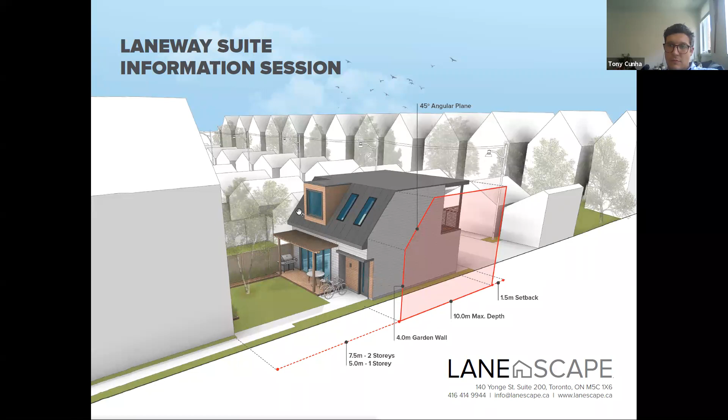So shall we dive in? Yeah, absolutely, let's do it. Cool, go ahead. Sure.

So we'll run through probably a similar outline to what you saw last year, although with lots of updates. We'll start with the macro about why Laneway suites are a thing, which we'll go light on since we've already talked about that. Then Tony will take you through the bylaws themselves so you can start to see how the Laneway suite policy is actually looking on properties. And then we'll extend that further by going through some of our projects under construction and talking about the typical case studies we see, so when you're speaking to your clients and buyers, you can understand when a Laneway suite is appropriate and what type is ideal.

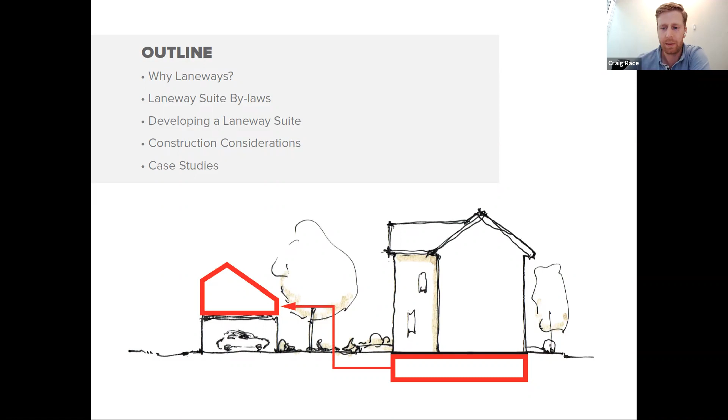So to talk about the macro, Laneway suites have actually existed in Toronto for over a century. There are a lot of historic structures that got absorbed into our urban fabric that were industrial and agrarian structures, like you'll see on the next slide here. These tended to predate the automobile—they were barns or industries that were just part of urban life before we had segregated zoning policies, and we actually needed things like horses and cows within our neighborhoods to sustain our communities. Once we started seeing those uses leave our neighborhoods, people still had these buildings kicking around, and they've been converting them into houses ever since.

That led to the typology originating as something that was more of a renovation of an existing typology. But in the late end of the 1900s, prior to the as-of-right policy being passed in 2018, I'm sure you've all seen the sexy architecture photography of new build homes constructed on parcels of land on laneways. These tended to be really exceptional works of architecture, but they required someone with a really unique property and a lot of money and knowledge to get through the OMB and other opaque planning processes. And that difficulty meant you would usually only do it if you were going to try to get a 3-story house—something fairly large and generally out of context with laneways.

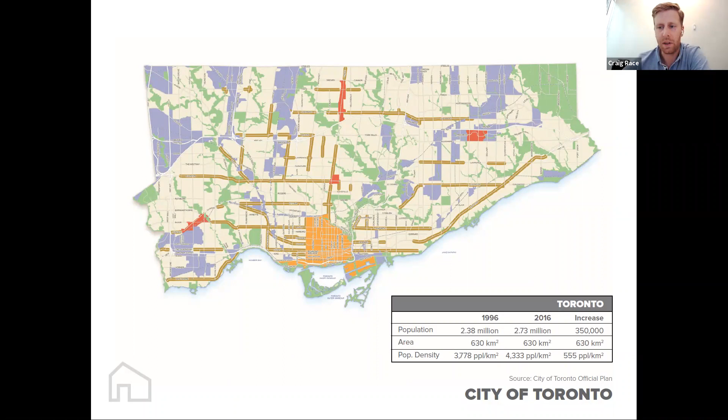So if we look at the census tracts in Toronto, for where our population is growing, you'll see that all the highlighted tracts are where we have population increases. Those tend to be centered around areas where we have mid-rise and high-rise zoning policies. Kind of makes sense. We have about 20,000 people a year moving to the city of Toronto, at least we did before COVID, so it makes sense that they would all move into high-rise towers and mid-rise homes where we're adding the majority of new density to the city. So that kind of tracks.

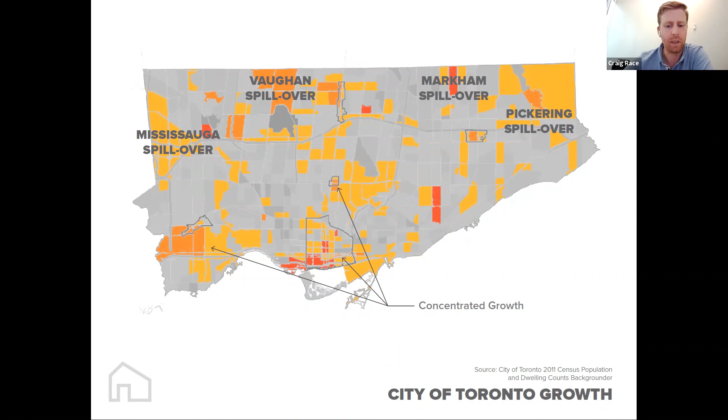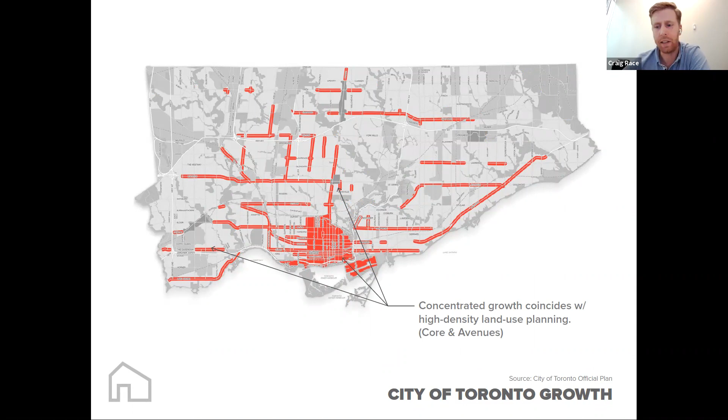Go to the next slide here, Tony. That's got the areas where we have those policies in place. But then when you look at the rest of the city, over half of our land area actually has a shrinking population. On the next slide, you'll see these are all the census tracts where our population is declining. And when you look at the fact that we have such a large gross population increase, the fact that the majority of our land area is actually accommodating fewer people does not make any sense.

That's led to a planning concept that planners are calling the yellow belt, not to be confused with the green belt. The yellow belt is really something that missing middle housing, and what we call missing little housing—things like laneway suites and garden suites—is really trying to readjust for. So the idea is that we want to maintain things like green space, but start to infuse detached housing units into these areas so that they can at least have a stable population while we continue to accommodate the majority of our growth on the avenues and in the core.

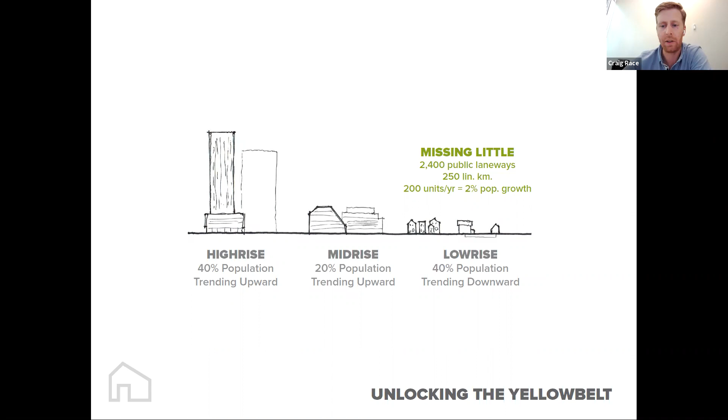So when we speak of the missing little, laneway suites alone are accommodating about 2% of our population growth every year. Garden suites will begin to increase that, which we'll talk about more later. But we're starting to see them have an impact on where people are choosing to live and how they're affecting our growth. So when you think of a laneway suite, always best to think of them as sort of like

a basement apartment that's in the back of your lot on top of your garage. They are not severable, which is one of the keys to remember. They will never be sold separately from the main house. The main reason for that is that services for them come from the main house.

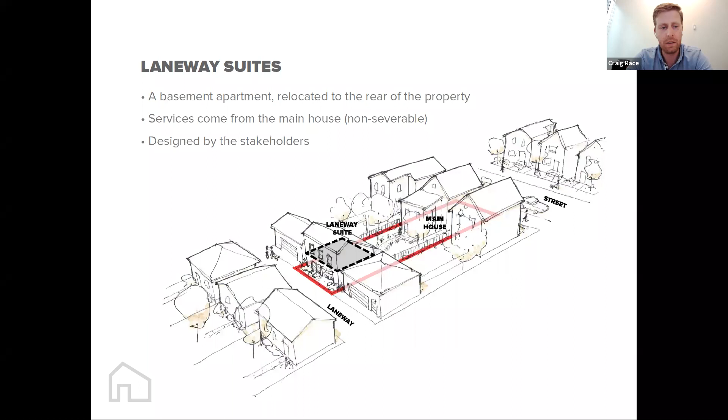And finally, the reason we think they've had such success, and why we have access to them as-of-right, is because they were so sensitively designed by stakeholders. This is a policy that homeowners literally came out to public meetings and designed with us and with the city. That's why we've seen such great buy-in and why they've become prevalent in our neighborhoods.

So it's important to remember the features they bring to a neighborhood and to a site. They're a very gentle form of intensification, relatively speaking. They're making good use of laneways, which we've always had a lot of life on—families have always used them for playing and socializing. Well, this helps animate them further and put eyes on them to make them safer.

They're really helping us diversify our housing stock in the yellow belt, which is leading to affordability. Now that's not technically capital-A affordability, but what laneway suites do help with is people who want to either accommodate a loved one on their site without having to buy them a condo, or rent out a unit but still have the main house to themselves so they can have a high quality of living. And not to mention the value it adds to a property, which we think has a big impact on a homeowner selecting whether they'll build one or where they're going to buy.

So now let's take a look at the bylaws themselves so you can see in more detail what that looks like. I'm going to run through a high level overview of the current bylaws. These were first put in place in August of 2018, and there have been a few small evolutions over the last 3 years.

At a high level, the term as of right means there's no requirement for a committee of adjustment or special planning approvals in order to develop a laneway suite. You would move straight through to building permits, so long as you comply with the bylaws.

Laneway suites are exempt from development charges. Typically if you're adding a unit or building a new home in the city, there's a levy applied based on the bedrooms or square footage you're constructing. For a single bedroom unit, that's $26,000; a 2-bedroom unit is closer to 50. That's a huge incentive for the average homeowner to take on a project of this nature.

There are some affordable housing incentives available through the city, and tax rebates available through the CRA. Vehicular parking is not required on the lot, so you could have a multiplex in the main house, which traditionally would need a certain amount of parking to be legalized. But as soon as you introduce a laneway suite, that parking requirement goes away. The laneway suite also does not count towards your lot density.

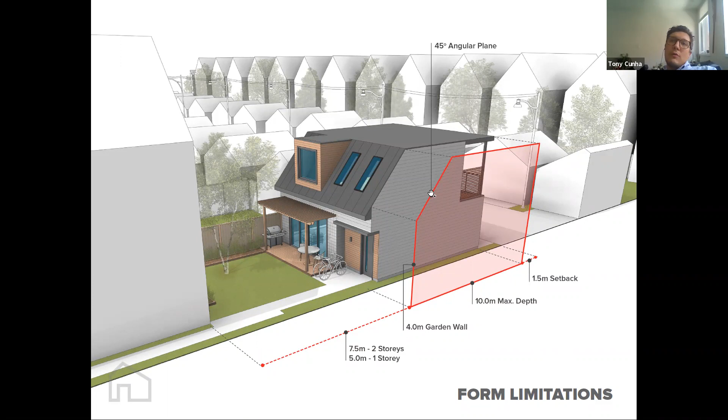The last main dictating piece you'll find on quite a few laneway suites is this angular plane. It's best described as an imaginary line fixed at 7.5 meters from the main house—imagine a 4 meter high line going upward and then chamfering back at a 45-degree angle. Your building must not project through this imaginary line.

In certain cases on a tight lot, we'll recommend doing a single story unit. You can do basements—a great way to maximize square footage with a single story unit on a small lot is by digging downward. There's some substantial cost to that, but when you look at the return on investment at that size footprint, it often makes sense.

For standard lots, when we're minimizing the separation between the 2 buildings, we'll just rigidly adhere to that zoning envelope and that imaginary line. On a deeper lot, it's always possible to locate your laneway suite further than 7.5 meters, which would allow you to clear that imaginary line entirely and build straight up—which is why you'll find some of our projects have that angular roof and some don't. We just find that sweet spot where it makes sense to maximize volume, outdoor and indoor area, and function all together.

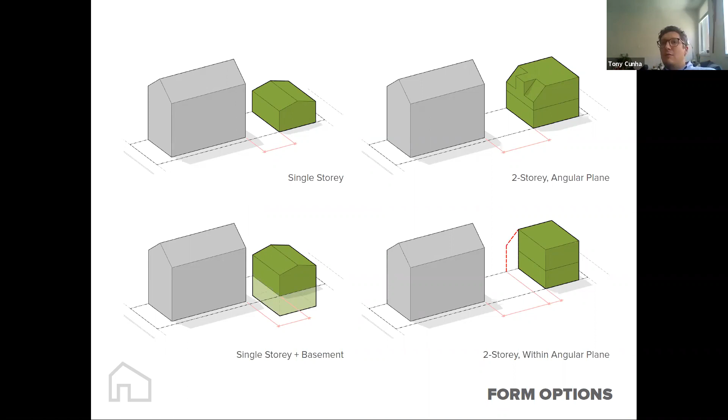So you can project through the angular plane with a dormer. This is a dormer projecting through that roof line, maximum of 30% of the building width, measured at 4 meters above grade.

And in exchange for this free density, whatever's left over, the city has strict requirements on landscaping area. So the area between the main house and the laneway suite, if the lot is less than 6 meters frontage, you need to provide 60% soft landscaping.

Soft landscaping is sod, mulch, soil, basically any organic ground cover that allows rainwater to permeate. So things like decks, concrete, gravel wouldn't comply with soft landscaping requirements. In most cases, existing hardscape must be retooled, but it's a small thing to endure in order to leverage the rest of the lot.

That requirement for the rear yard goes up to 85% for lots greater than 6 meters in frontage. And in all cases, the setback between the laneway house and the laneway itself must be a minimum of 75% soft landscaping, excluding a permitted driveway. So if you wanted to keep a garage within the building, you don't have to, but some people do in order to maintain parking for resale or whatever else it may be—that would be exempt from that calculation.

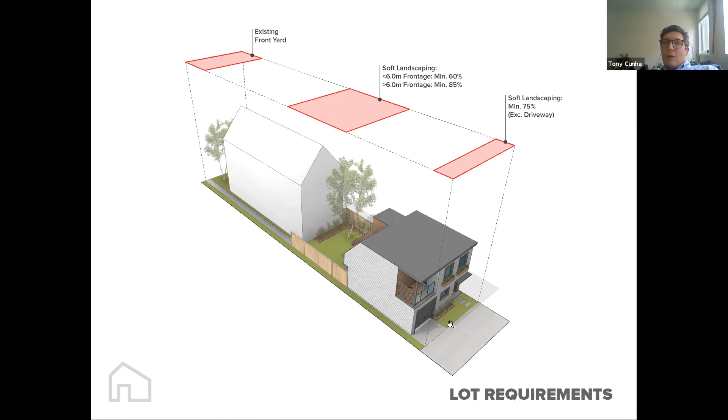Then a few other smaller requirements. First, the building height is maximum 6 meters or 2 stories. So usually we can get an 8.5 to 9 foot ceiling on the ground floor and then an 8 foot ceiling on the second floor, or vice versa.

And you can exceed that building height with mechanical equipment and whatnot, so long as it's no higher than 1 meter above that building height restriction, and it's set in from the roof perimeter a minimum of 1 meter.

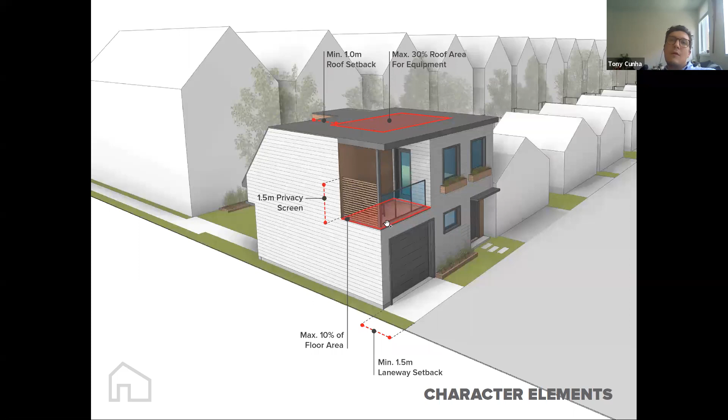And you can have a balcony or terrace, whatever you'd like to call it, so long as it doesn't exceed 4 meters above grade, and it has to be within the building footprint facing the laneway. It must not be on the rear yard side.

So whenever you're looking at a lot to qualify for a laneway suite, this is probably the most contentious issue—emergency access probably disqualifies about 25% of the properties that come across our desk. So basically, when you don't have a house facing the street, you need to be able to get fire and emergency access to that building somehow.

So you have two options in that case—this is an either-or, you don't have to provide both. The first is pretty straightforward: it's a maximum of 45 meters measured from the entrance of the laneway suite at the backyard, down the side yard to the front. This side yard access route must be a minimum of 0.9 meters, about 3 feet.

Ideally that's wholly within your property, measured from your existing building face to the lot line. Now, if it's not, and you have to use a portion of the neighbor's property to get sufficient clearance, then there is an agreement available that you can enter into with your neighbor in order to ensure that area is reserved for emergency access between neighbors.

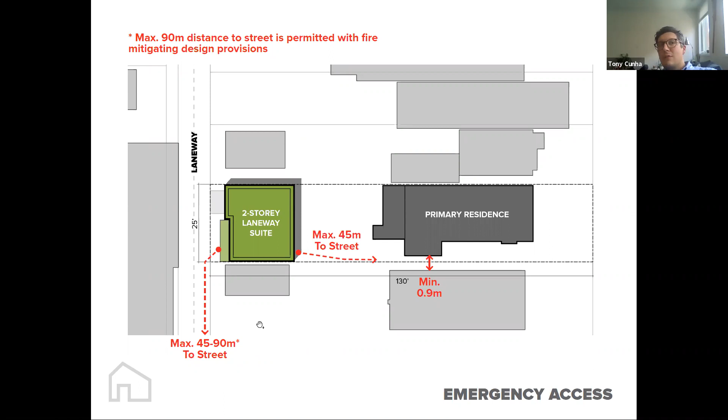Then the second option is a 45-meter access route via the laneway to a street. Now that 45 meters can be exceeded up to 90 meters, so long as you provide sprinklers or a fire alarm. There's a couple options there. So the best case scenario is that you're within 45 meters, but if you can get in within 90 meters, that's totally possible—you just have to do a little bit more work and incur a little bit more cost in order to make that happen.

So applying this, we had, in this case, 44.8 meters measured to the curb, and then 31.2 meters measured from the curb to the hydrant. The best way to look at this is you have a pumper truck or fire truck that pulls up to a curb—they don't access the laneway, and they have to extend a hose in one direction to the fire and a hose in the other direction to the hydrant.

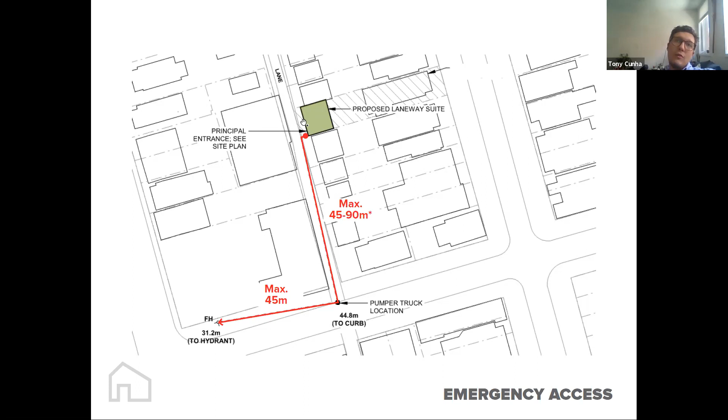I like using this example because if your entranceway was on the north side of the building, we would all of a sudden be over the 45 meters and we would have to put sprinklers or something else in. So it's important to be conscious of these things and be able to design in a way that makes the most sense.

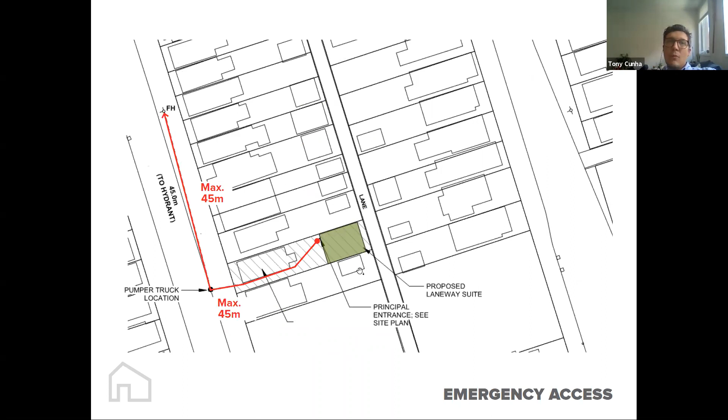We have quite a few clients that are building for extended family, whether that be in-laws or aging children, or a combination of both.

And then the last is increased space. It was a very popular cohort for us, particularly in peak pandemic, where people were looking for that away-from-home office space that could flex into a hobby space, storage, or just additional space for their kids on the weekends and things like that.

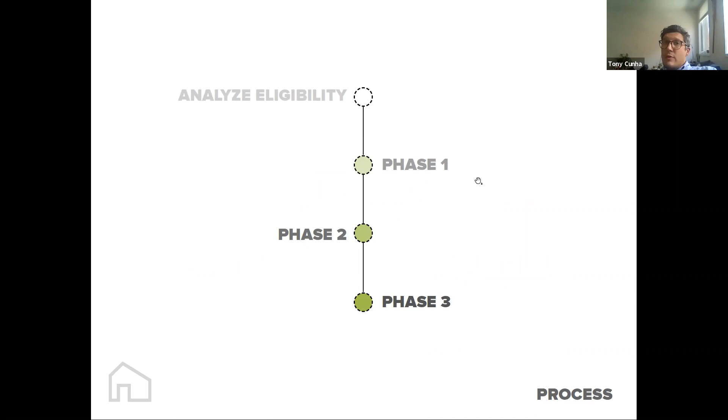So we always advocate for a three-phase process. This is how we structure our services. Before you get there, we always recommend analyzing your eligibility, identifying opportunities and challenges, and doing as much due diligence as possible.

There are quite a few service providers in the market, and a lot of them are very qualified. But the unfortunate thing is that we've found many agents work with certain providers that don't have a complete grasp on the bylaws and may have some misleading material in their packages. So we highly recommend checking in with at least two different experienced professionals. Let me put it that way.

So for example, with us, we provide free property reports. All we need is an address or a listing, and we turn these around within a couple of hours. The report has a checklist analyzing eligibility, determining buildable square footage, alongside some example floor plans and projects of a similar nature, and then a complete summary of the process.

Tony, can I just jump in real quick here, because you guys did one of these for Samantha on our team just a few weeks ago. It was her first week, and she was showing a house her client hoped to build a laneway house in. Unfortunately, he didn't buy the property, but that report you provided her within, like you said, a couple of hours, was beautifully presented. It had all of the options—it was really, really helpful. So I thank you for that, it was really a great piece.

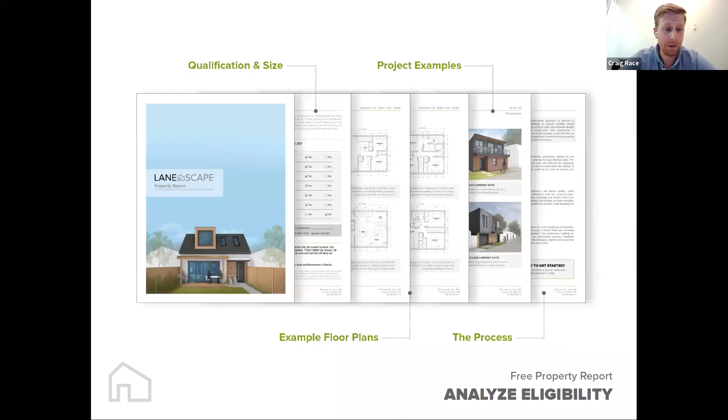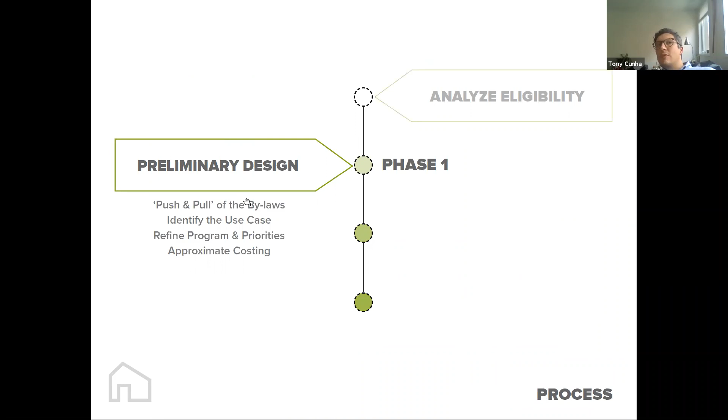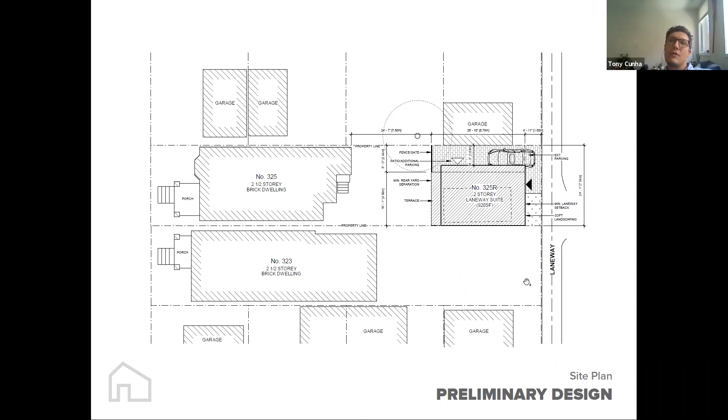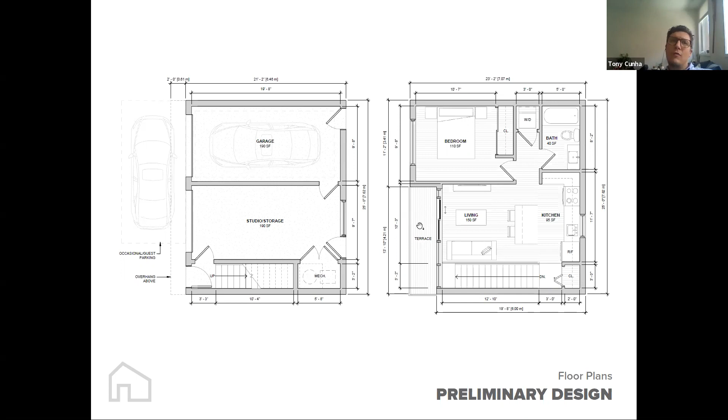Thank you. And then we really jump into preliminary design. This is our first step of the design process, working through a basic site plan, identifying key items like protected trees, minimum setbacks, access, privacy, parking, and basically applying the bylaws to the property itself. We put together basic floor plans that are dimensioned, highly resolved, but not quite engineered—I akin these to a condo sales plan, making sure we have the exterior envelope, but also working from the inside out to accommodate our programmatic goals.

We do a cost analysis. We're not only architects, but developers and builders, so we like to connect the dots physically and financially—looking at different options for bedroom counts versus parking, different considerations with costing, but also the revenue potential, both in terms of monthly or annual cash flow, and in terms of stabilized value using a standard cap rate.

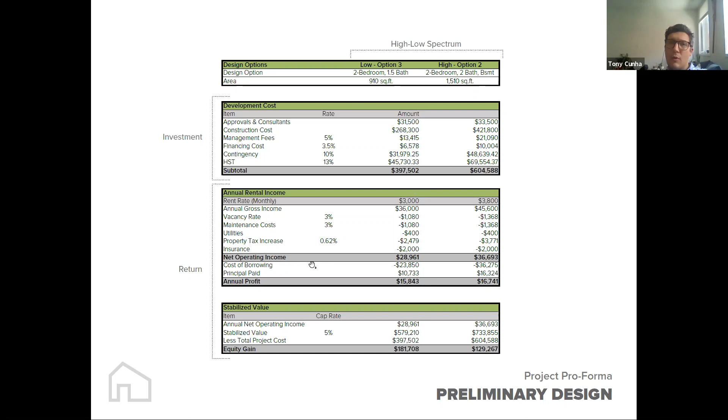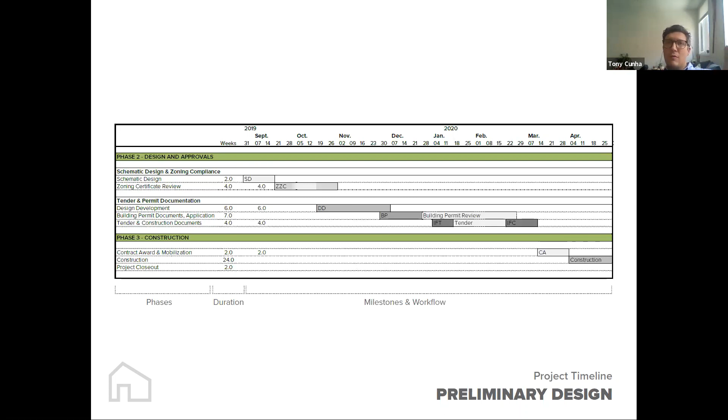Time is money as well, so looking at the timeline and being realistic about the phases of deliverables and how we evolve this from day one to keys in hand.

Sorry, Tony, I just want to point out we do provide everything Tony just listed in phase 1 as a design package that is not free, but it can be really good if you're selling a property. The property reports are free and unlimited. Phase 1 would be something to consider if you have a listing with really good laneway potential, to spend the money on customized floor plans and having budgets and schedules to leave out at your open houses or to send to buyers. That's far more dense and something we think is worth its weight in gold when it comes to listing a property.

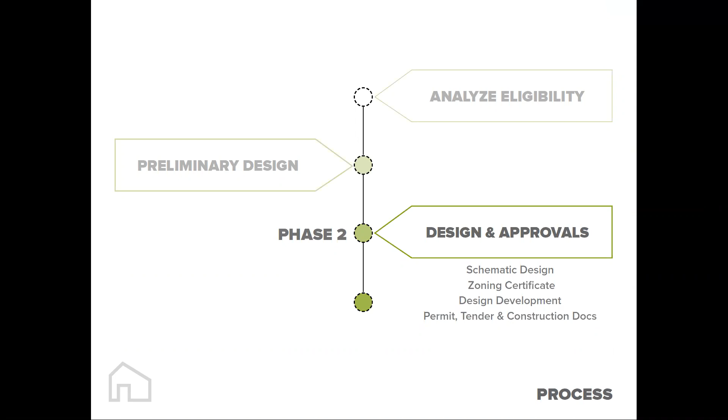Is there a standard price for that, or does it vary with the property? That's a standard price, we bill it's $1,850 plus HST. We turn that around within a week or a week and a half if we have a survey available.

Thank you, and it usually includes a couple of different options. A different user is going to want to see different things in a laneway suite, so normally we do an option that's geared for revenue and an option that's geared for grandma, so you can see what the difference looks like from a design perspective.

Once we've decided on a general direction, we're on the same page with costing, and have more or less locked in those floor plans and building footprint, that's when we really dive into resolving the design.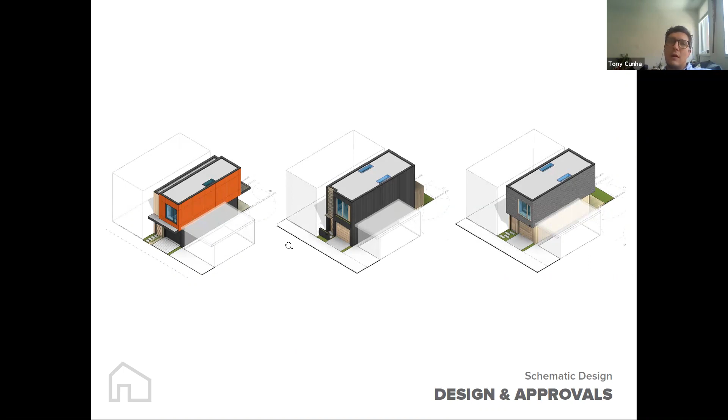We start by putting together multiple options for the building envelope, how this can be cladded, how the geometry can work, how apertures and overhangs can be treated in different ways. Then we'll put together some eye-level perspectives. We work in 3D, with a 3D modeling software that's incredibly powerful, allowing us to literally walk the average homeowner through every aspect of the design process. And then we resolve everything.

We structure our services in a way where we include all of the structural and mechanical engineering. We are your one-stop shop.

I always tell the homeowners we work with, you have three responsibilities. The first is review and provide feedback on the design. Number two is provide a signature on the application. Number three is pay your invoice. Besides that, everything is in our hands, and it's a very seamless process that does not take very long. You said those in reverse order, by the way.

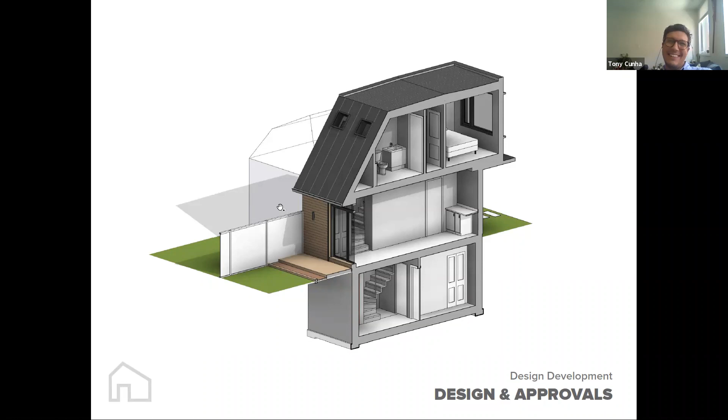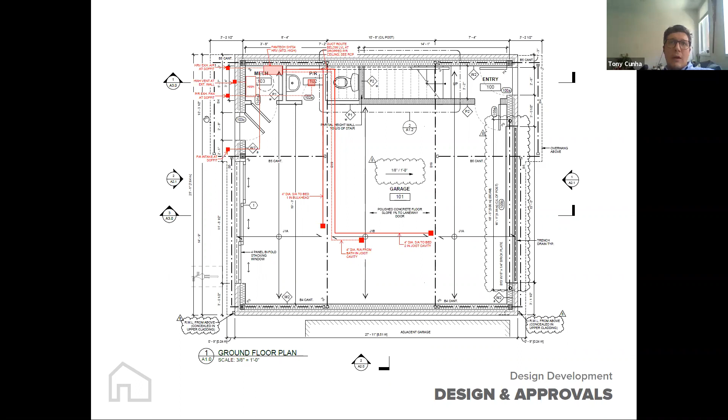We take pride in what we do with our drawings as well. Another thing I commonly say is the reason we're able to have so many projects underway at a time is because we put the time and effort into resolving the building in digital space before physical space. So everything is coordinated, and we work through this not only aesthetically, but also functionally, working through interior palettes and things of that nature.

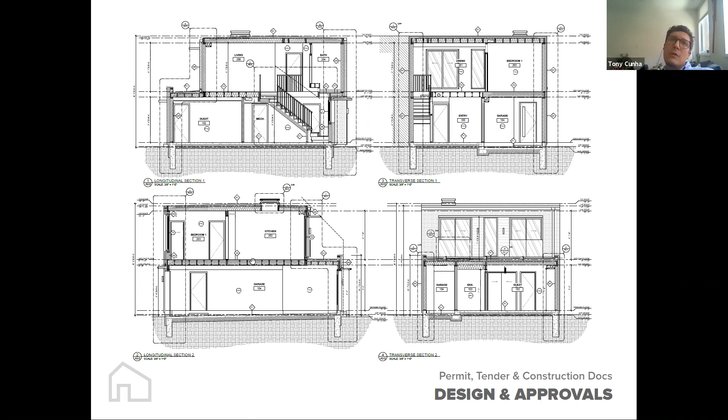And then ultimately resolving our drawings for permit, tender, and construction, working through details and interior elevations and details as well.

It's a little bit unique to have such a comprehensive package from one provider, especially in a custom residential space, but we find that working with the average homeowner is a huge value add. I would say 95% of our clients have not done so much as renovate a bathroom, never mind build a brand new house. So it's a very pleasurable process when you're able to really focus on the things that matter, and you have one point of contact that evolves everything from day 1 to day 300.

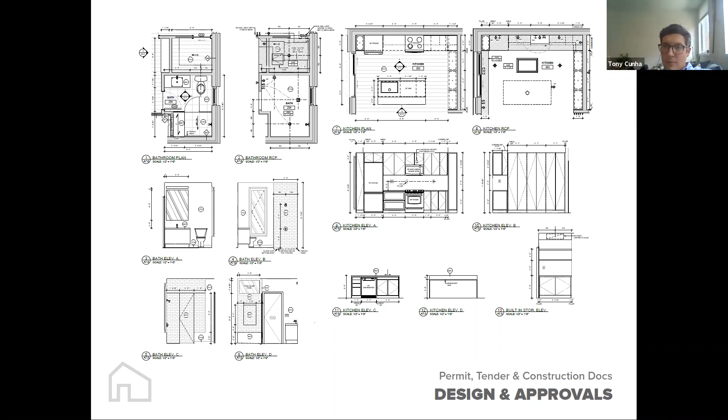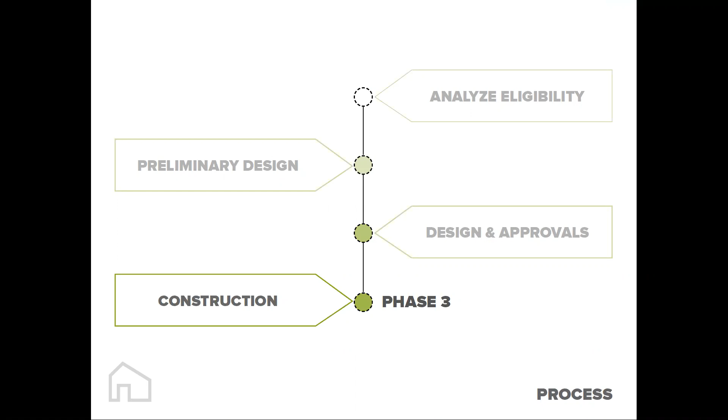I don't think we can underestimate that, because when you have that one point of contact and somebody coordinates everything for you, you don't have to jump around between people trying to figure it out yourself. So I think that's really, really important too.

100%. Everybody's busy, that's what it is. You don't want something looming over your head, so what we rely on is a very templated process.

The way I best explain it is, a lot of people ask, do you do prefab laneway homes? We don't do prefab in terms of construction, but our process is prefab. Everything behind the curtain, there's an app for that, a form for that, a template for that. Everything we do is completely custom, but everything is a kit of parts, which allows that process to move so seamlessly, but also for the homeowner to be engaged and in control.

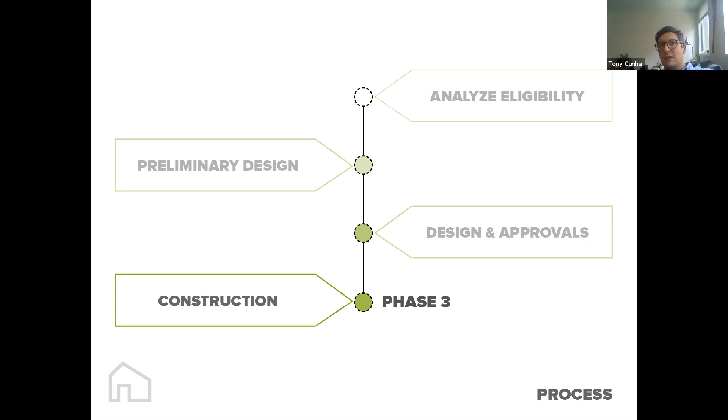So we'll dive into construction. As Craig had mentioned in the beginning, service connections are all made to the main house. Your 4 key pieces here are your hydro, your gas, your domestic water supply, and your sanitary line, sanitary being your wastewater.

You can put a separate hydro meter on the main house and have the laneway suite on its own account. But with gas and water, it is all on a single meter from the provider. You can put a check meter on, of course, if you'd like.

We will often have to upgrade the electrical service from 100 amps to 200 amps. Gas is usually sufficient, and in some cases we have to increase the water supply from the street from a 1/2-inch line to at least a 3/4, but that really just depends on the demand in the main house and the age of the line.

So really when we're making these connections, it's a matter of looking at it—there's 10 different ways to approach the same thing, but there's always one very clear best way. So things like access, location of the existing services, the condition of the basement, and the nature of the lines being connected—for example, do you need gas or not—those different factors all come into play in determining how best to make these connections.

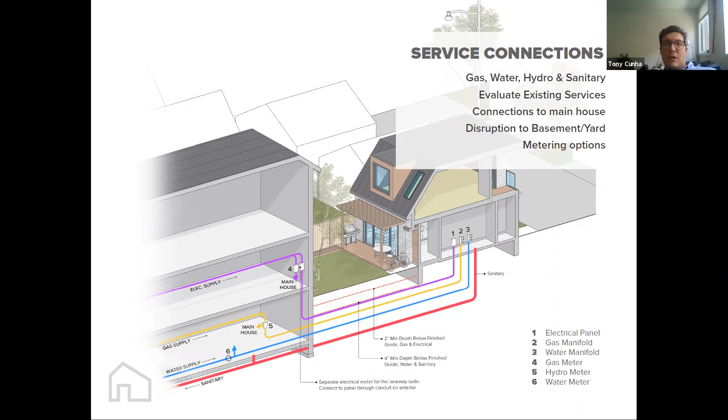Our structure—we use standard stick frame construction. We have looked into various different methods of prefab or modular construction, and have always found that a sort of 2x6 and TGIs are going to be the most cost effective, the most versatile, and quite frankly, the easiest to build in the tight confines of a laneway.

So we are constantly evolving our details and our methods, but what we're able to do with these standards is competitively tender to a wide array of different contractors. Some of the homeowners we work with have builders they like to work with as well, so this allows us to be flexible.

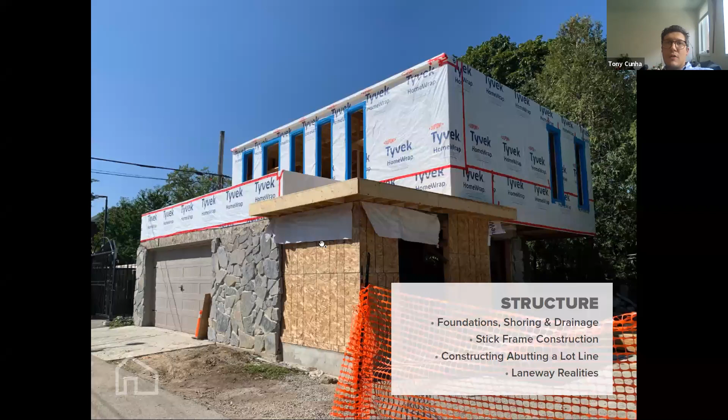Construction drawings are like sheet music. There's an inherent understanding of standards. So the less you diverge from the standard, the more cost effective and the more successful you're going to be.

And likewise with the building envelope, we do employ going above and beyond code minimums. We use things like exterior insulations, sheathing tapes, smart barriers, and we believe in strategic investments in the key aspects of the build.

So you're creating a super airtight, thermally efficient envelope. Just yesterday I was walking through one of our builds that has a concrete floor on a concrete slab on the ground floor, and I was in the garage and it was cold, and I said, 'Man, can you turn down the AC?' And he said, 'The AC is not on.' This thing is so airtight that a lot of times it's a mere formality in putting in HVAC systems.

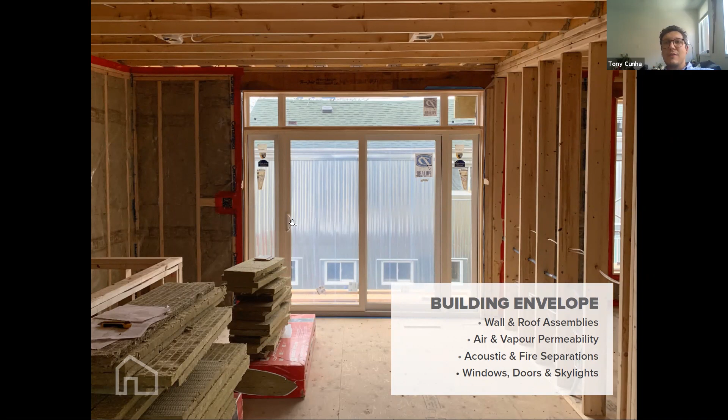In that same vein, HVAC systems—really, the laneway suite is heated and cooled on its own. So we're running those raw services to the laneway suite, but you still have an air handler, a furnace, or a heat pump that's heating and cooling air at that location.

So really what it comes down to when you're selecting the system is how big is the unit, what's the control and comfort level that's required, and what's your energy source. Really, this is another one of those things where there's multiple different ways to approach the same thing, but there's always one best way.

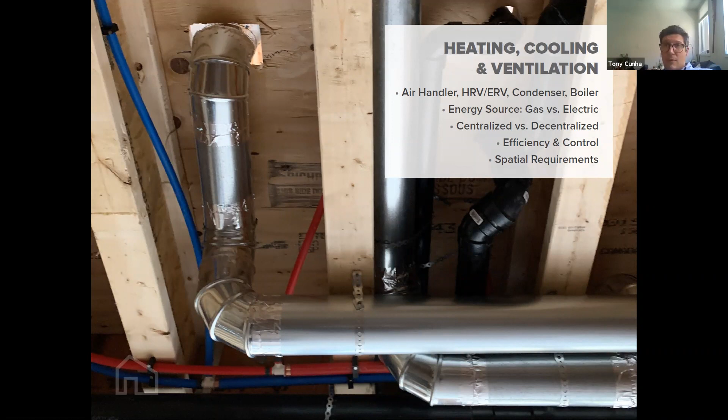And then finishing, really, at every point in the process, there's sort of 3 key things that come into your decision making: cost, maintenance, and durability. And then between the different use cases, whether it be rental or for grandma or for yourself, you always want to weigh those considerations differently.

And let's not throw out the idea of the aesthetic direction. I mean, quite a few of our builds are modern, but we do quite a bit of classic as well. And again, what about the strategic investments? Going a little bit further with a nice countertop, but dressing up some IKEA cabinetry, or looking at alternative ways of achieving hardwood floors or whatever else it may be.

So we'll dive into 2 quick case studies. The first is our Seaton Village laneway suite, not sure if you've seen this by now. This was finished about a year ago now. This is a 1,050 square foot unit built for mom and dad's daughter.

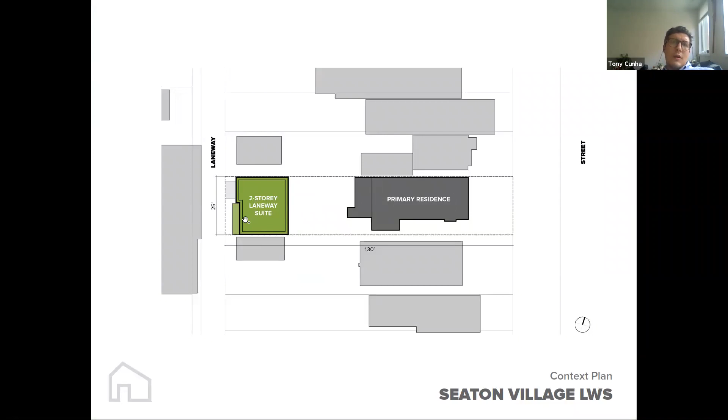The homeowners lived in the main house, had a very tight budget. Project almost didn't happen, but what we did was determine a realistic budget upfront and work toward that at every stage in the process. So the ground floor, we had a single car garage for mom and dad, a home office that could become flex space now and in future.

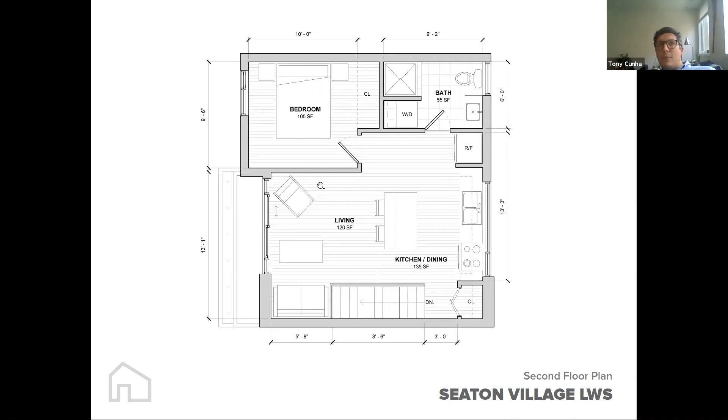Then the second floor was a compact 1-bedroom, very uniquely tailored to exactly what the homeowner's daughter wanted and required. So here, total construction budget, or the total development budget, arrived at about 380K.

Just being frank, that's not possible in today's market. Most of our developments are coming in around the 450 to 500K mark. But there's always room to work toward budget. And then we always put together a return analysis, regardless of the use case.

So we approximate this, it's a 1+1, right in the heart of Seaton Village. It's walking distance to a subway. So we projected a $2,800 a month rental rate, minus operating expenses, cost of borrowing, and factoring in principal paid. We're looking at about 14 grand cash flow annually.

And then when you apply a very conservative 5% cap, you're looking at a total stabilized value of 540K, minus your project cost at 390, gives you a net equity gain day one of about 150 grand.

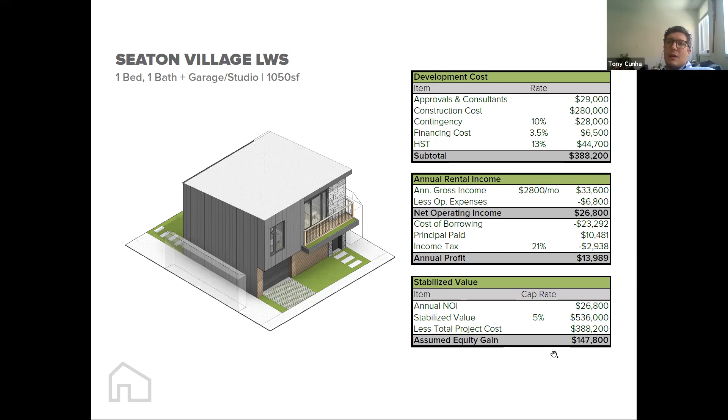And then this is on the opposite end of the city. This is at Danforth and Dawes. We worked with the homeowner here. He was on the hunt for a laneway eligible property. So we actually went through an analysis of probably 5 or 6 other lots before we landed on this one.

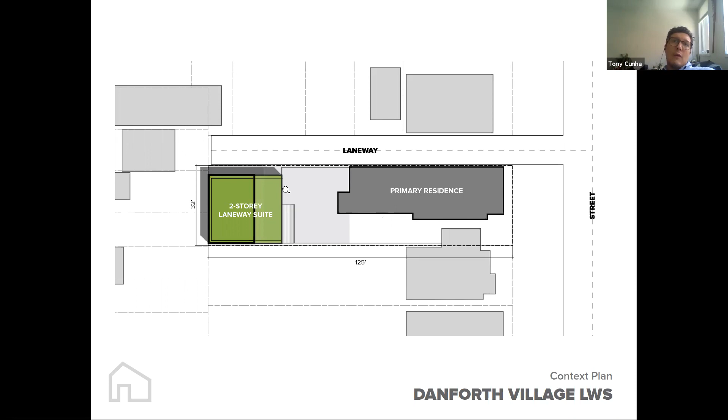I had this come across my desk one day and I shot it over to him and was like, Harry, this one's a gem, let's take a look at it. And so what we did was we worked with the homeowner to convert the main house into a 5-plex, and then we built this awesome family-oriented rental at the rear.

So this is about 1,450 square feet, I want to say, dedicated dining, kitchen, living. And then you get 3 large bedrooms, a full principal suite with a common bath. So we could have gotten 4 bedrooms in this, but each bedroom would have been 9 to 9.5 feet.

And we felt as though when we did the analysis, a 3-bedroom unit with some elbow room made a lot more sense in the long term. Not only in terms of quality of space and quality of living, but also in terms of revenue. The intent was not to have a high turnover rooming house. It was about building something that was good, have a stable long-term tenant.

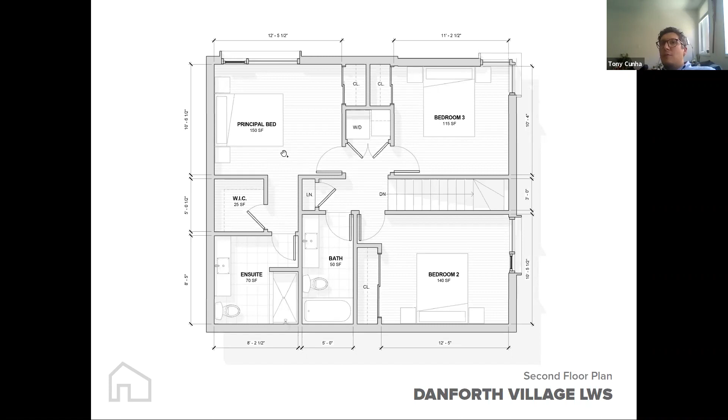So this project all in came out to about 550K. This is grossing about $4,000 a month, minus your operating expenses about 40K a year, and then annual profit at about 21K. And then again, assessed at a modest 5% cap rate, we're at 786,000 minus your project costs. We gained 234,000 day one.

And this was actually when he went back and refinanced based on this, and he accessed another 80% of that reappraisal. So proof's in the pudding.

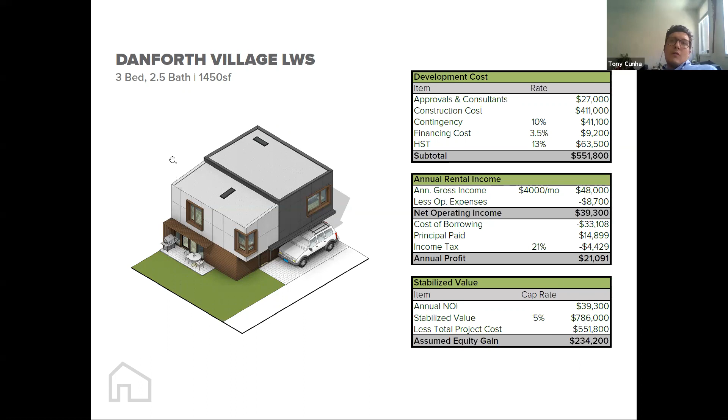Anyone who owns a house on a laneway right now, like, we've never made a pro forma that wasn't cash flow positive and equity positive from day one. So they're great investments, especially if you already own the land. If you're going out looking for the land, that's a slightly different case based on what you can buy it for, but they're great. You get to build a second house without going to committee of adjustment and without paying development charges. They're fantastic.

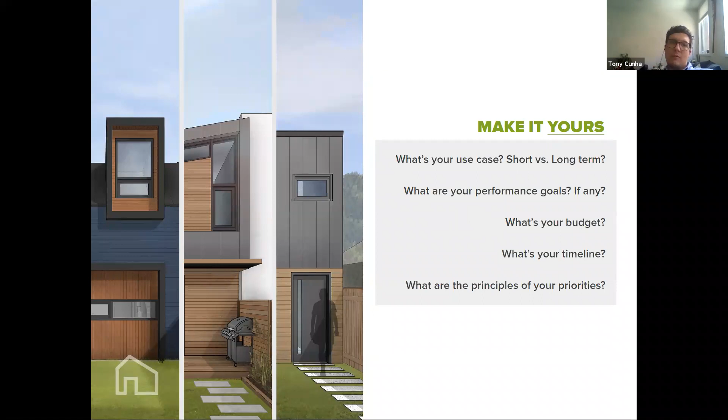So all it is, the final slide here, are some really key questions that we recommend everybody ask themselves, whether they're building it for themselves or as a rental or for family.

I'll just run through a couple of our projects that we've completed. This is Seaton Village, this is that Danforth Village, this is one we recently finished in Cabbagetown, Dovercourt Park we finished last year, Corso Italia, this is in Leslieville. Craig finished this one in 2014, before the bylaws were in place. And this is one of our first in Cedarvale.

And that's it. I think there's only 3 people here, but you're more than welcome to ask any questions. And I believe this is being recorded as well.

So the key takeaways to leave with are that the value proposition of a laneway suite is very powerful. So if you have a listing, being able to communicate that value is going to help you get an even higher sales price for your property. And it doesn't take much to have the documentation to have a really clear picture of what that laneway suite can look like. That's something for your listings to remember, and also for your clients who are looking to purchase. Our free property assessments are hopefully going to be a very valuable tool for you, either helping you verify another consultant's report or possibly just shine a light where there's currently shadow. So hopefully our services there are something you can put to good use to really benefit your clients and, at the end of the day, help you get higher sale prices.

Any questions? I think Jaspreet -- doesn't look like. Okay, so just a quick question, a little bit more on the sustainability aspect of it.

Have you guys built or designed something potentially where it's a little bit more off the grid, not so reliant on the services from the main house? Has that been questioned or brought up? Just out of curiosity.

Definitely. Getting a laneway suite to being off grid is very challenging. The main reason being their roof area is limited relative to their volume, so getting a PV array that can provide all the electricity for the house is difficult unless you have really optimal orientation. Maybe not completely off the grid, but maybe a little less reliant on services coming out of the main house. To be honest, getting like 80% there is where you see the most bang for your buck and have the biggest impact on our environment. That's really easy to achieve with any building, including a laneway suite.